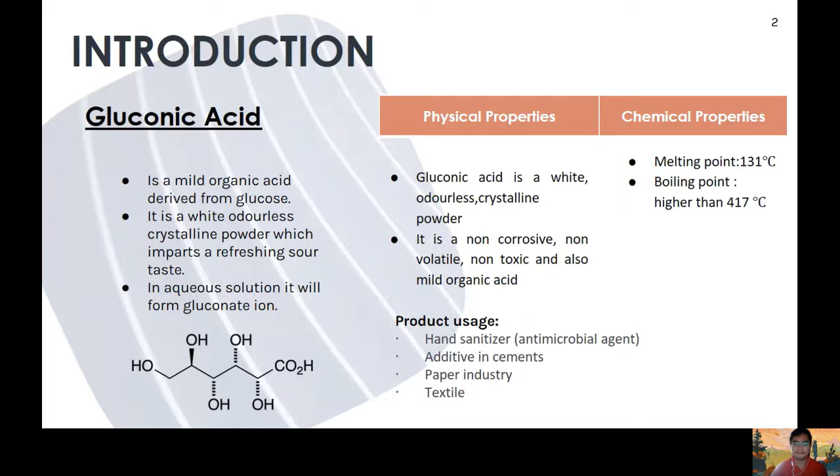The raw material for the production of gluconic acid is oil palm frond. There are several parts of oil palm which we need to consider: the OPF, empty fruit bunch, and the kernel shell. The OPF was chosen because the resource availability is around 45 million tons, whereas the EFB and kernel are only 9 million tons and 4 million tons respectively. The resource cost of the OPF is around 62 cents per kilogram. For the EFB it is around 40 cents, and kernel is around 45 cents per kilogram.

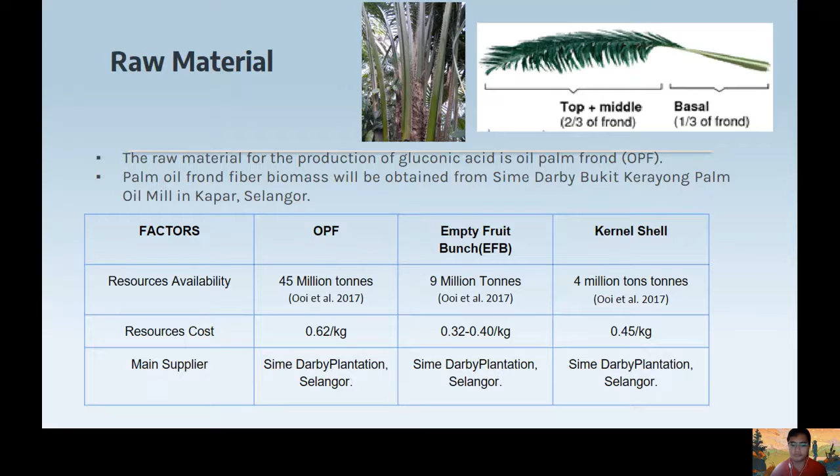For the process design level 1, this is our process structure. The raw materials of this process are air, ammonia as the nitrogen source, sulfuric acid for the acid pretreatment, water, cellulase enzyme, Aspergillus niger SP, and the oil palm frond. For the products of this process, the main product is gluconic acid, the waste materials are the black liquor and wastewater, and the side product is the biomass. We also produce carbon dioxide as waste from this process.

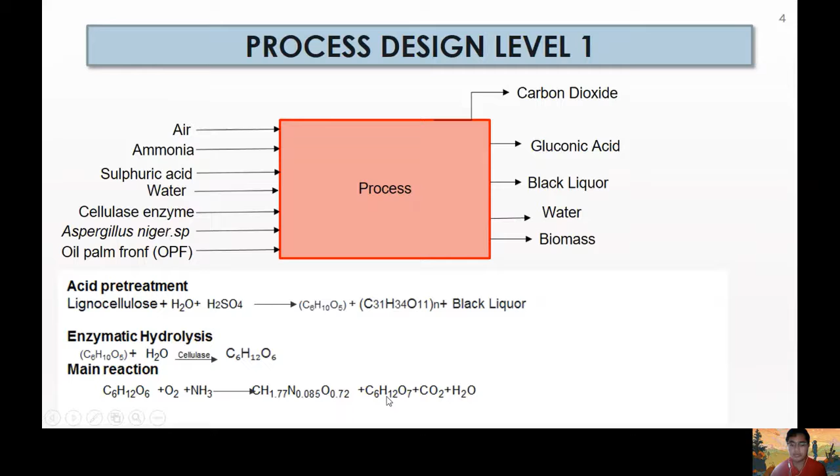For the acid pretreatment, the lignocellulose, which is part of the OPF, will be treated with sulfuric acid at only 4% concentration, and we produce cellulose, lignin, and black liquor. The cellulose from the acid pretreatment will undergo enzymatic hydrolysis, where cellulose reacts with water with the help of cellulase enzyme to produce glucose. The main reaction is the fermentation process, where glucose plus oxygen and ammonia will be fermented to produce biomass, gluconic acid, carbon dioxide, and water.

OPF consists of several components such as lignin, hemicellulose, and cellulose. OPF will undergo the pretreatment process to separate the components to obtain the cellulose. Cellulose, water, and cellulase enzyme react with each other in the reactor to produce glucose. Once the glucose is obtained, it is fed into the seed fermenter with the A. niger. Oxygen is needed for growth as it is an aerobic organism.

Next, it is fed into the main fermenter to produce our desired product, gluconic acid, and also obtain the byproduct. Then, it will undergo multiple separation processes: first filtration, then crystallization, centrifugation, and finally drying. The desired product, gluconic acid, is obtained in the solid phase at the end of this process.

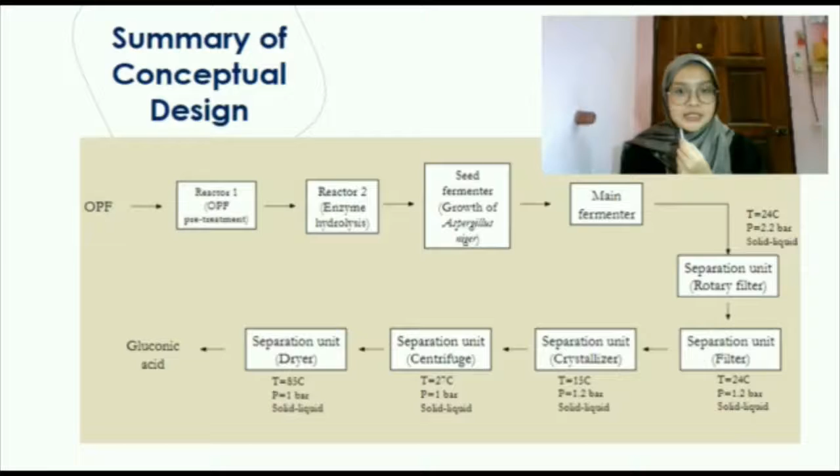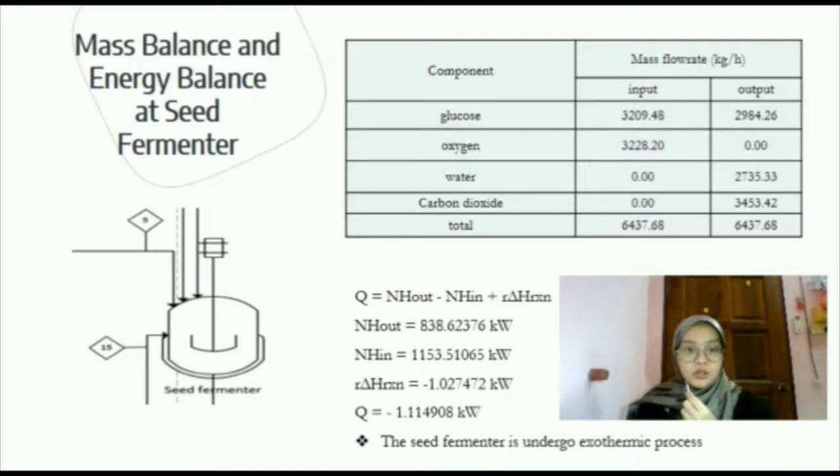Mass balance and energy balance for every unit operation was conducted. This slide shows the mass balance and energy balance for the seed fermenter. Based on the table, the mass flow rate for input and output streams in the seed fermenter is balanced with a total of 6,437.68 kg per hour. The reaction in the seed fermenter is exothermic since the value of Q is negative 1.114908 kilowatt.

Next is the mass balance and energy balance for the main fermenter. Based on the table, the flow rate of input and output streams of the main fermenter is balanced with a value of 18,122.54 kg per hour. The equipment undergoes an exothermic reaction as the value of Q is negative 1.64490 kilowatt.

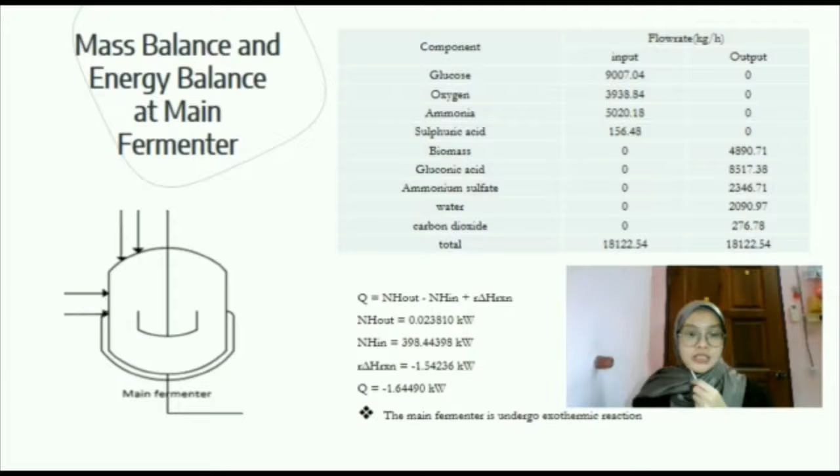Next, both graphs show the relationship between temperature and conversion in the seed fermenter and main fermenter. As we can see, the process is adiabatic. As the temperature increases, the conversion also increases. The reaction is an exothermic reaction.

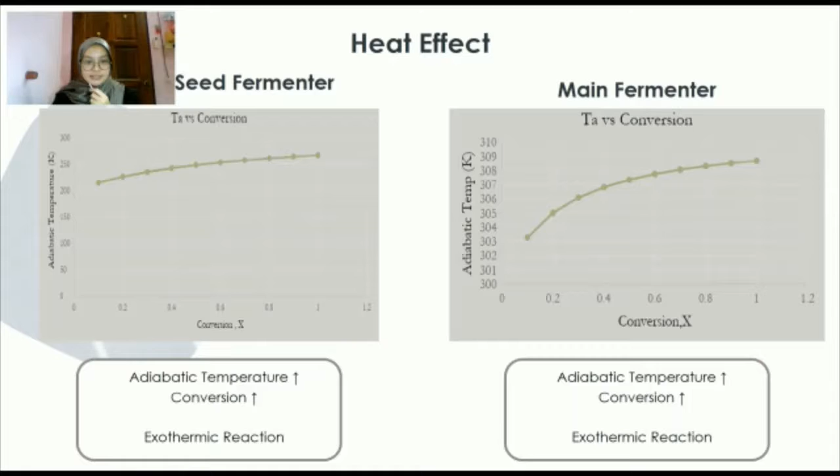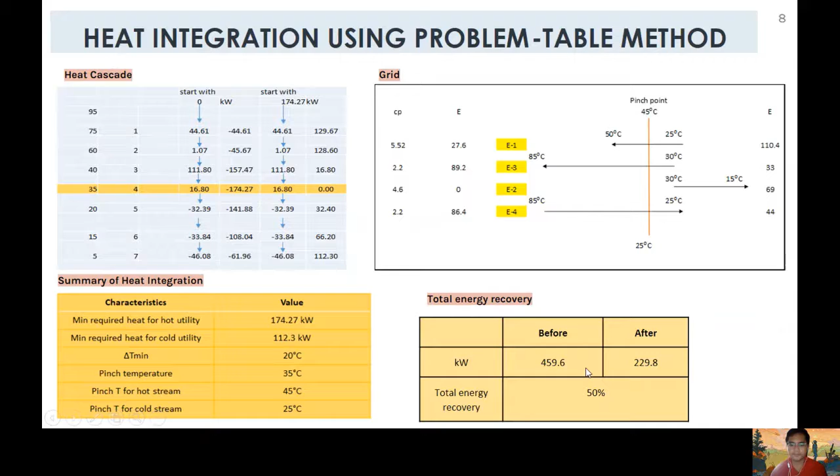For the total energy recovery, before the process is around 459.6 kilowatt, and after heat integration is 229.8 kilowatt. So the total energy recovery is at 50%. So this is our PFD after heat integration. You can see the cold stream and the hot stream.

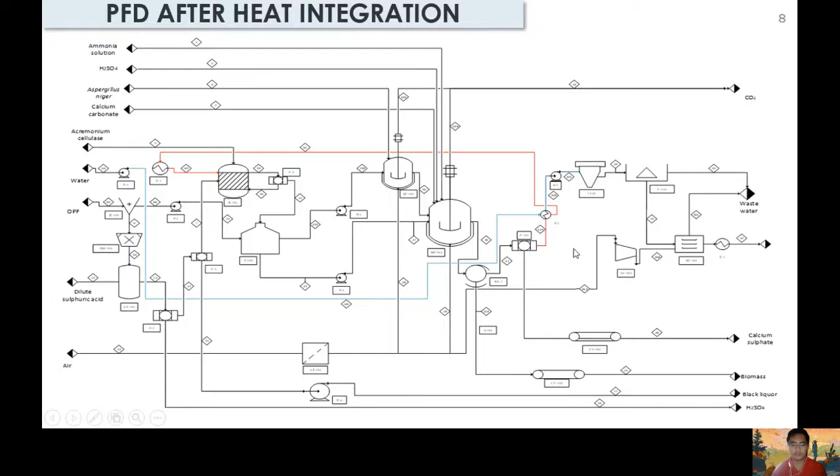Piping and instrumentation diagram for our design project, which is titled Gluconic Acid from Oil Palm Biomass. We are using Aspergillus niger as our bacteria in order to produce a high yield of gluconic acid. Examples of controllers that have been used in our design project are the anti-foaming controller, pH controller, temperature controller, flow controller, and level controller. The objective of these controllers will be discussed in the next slide.

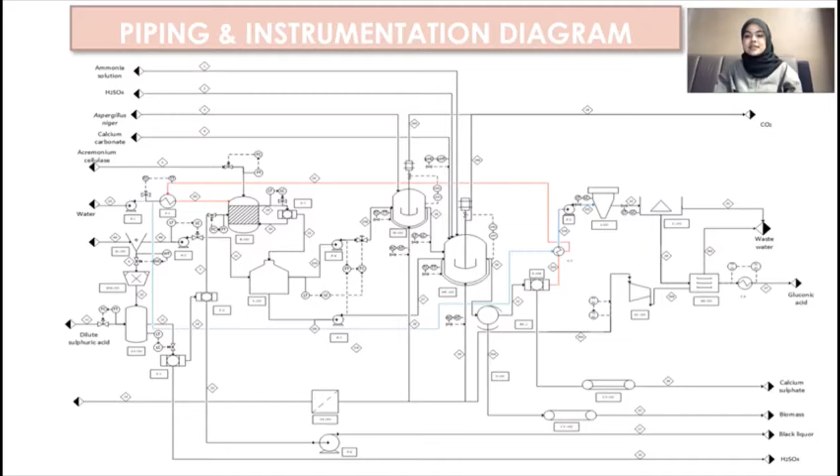Instrumentation and control summary for the first equipment, which is seed fermenter SF101. The type of control that we use is a temperature controller, which is to control the temperature of process fluid at a desired temperature. And then dissolved oxygen controller, it is to maintain the necessary dissolved oxygen concentrations. Anti-foam controller is to control the foam formation, and also level controller to control the level of working volume of the fermentation fluid.

Next equipment is the main fermenter, MF102. The controller that we use is a temperature controller. It is to maintain the temperature of medium in the main fermenter at the desired temperature of 28 degrees Celsius. For pH controller, it is to maintain the pH of the medium of Aspergillus niger, which is our bacteria, at the desired pH, which is around 5.5. For dissolved oxygen controller, it is to control the dissolved oxygen in the process fluid. And then anti-foam controller, it is to control the foam formation.

Next equipment is a storage tank, which is T101. The controllers that we use are a level controller and also flow controller. It is to maintain the level of the glucose storage tank and also to control the flow rate of the glucose based on the level controller. And then the reactor R102. The controllers are temperature, flow and also level controller. It is to maintain the temperature in the reactor at T equal to 37 degrees Celsius and also to control the flow rate of the inlet stream and also to maintain the level in the reactor.

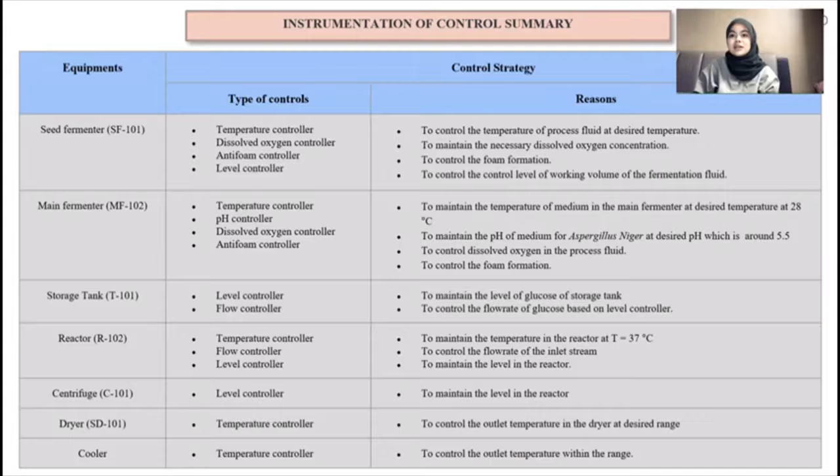For centrifuge C101, the controller that we use is a level controller. It is to maintain the level in the reactor. For dryer SD101, the temperature controller is to control the outlet temperature in the dryer at the desired range. And lastly, the cooler has a temperature controller, which is to control the outlet temperature within the range.

Assalamualaikum warahmatullahi wabarakatuh. My name is Muhammad Hanif bin Zakaria, and now I will continue our presentation for the process safety part. So in our production of gluconic acid, we are following the major acts, which are OSHA, Occupational Safety and Health Act 1994, Act 514. Next is Environmental Quality Act, 1974. And we also follow the Factories and Machinery Act, 1967, Act 139.

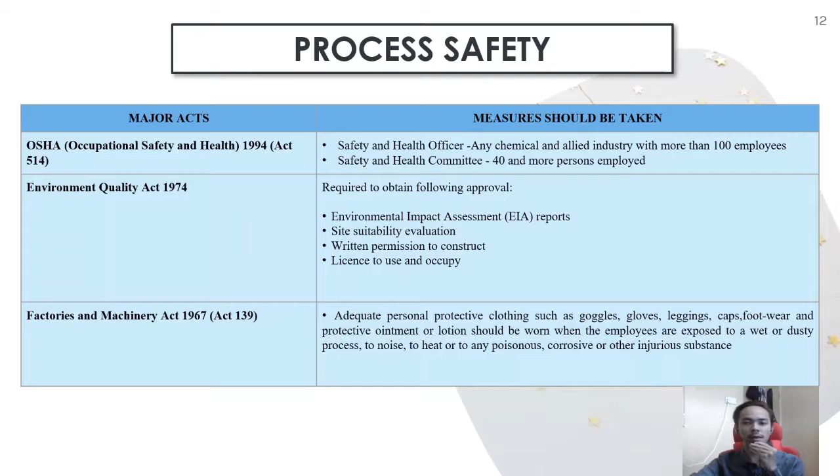For the HIRARC analysis, in our production plant, the hazard that can occur is the explosion from the reactor due to over temperature. The risk level is high, so we can control the risk by installing the high temperature alarm and also the emergency response plan. Next is the oxygen pipe inlet that can cause fire due to ignition at the lower temperature. So it also has a high risk level. So we can also control the risk by installing the high temperature alarm and also the emergency response plan.

And next is the addition of ammonia in the seed fermenter, which can cause physical injury. The risk level is medium, so we can schedule inspection and maintenance for the equipment. Next is storage of sulfuric acid, which can cause physical injury due to overflow. So we can control it by scheduled inspection and maintenance of the equipment. Next, the pumping of sulfuric acid also can cause physical injury. So we can also schedule inspection and maintenance of the equipment.

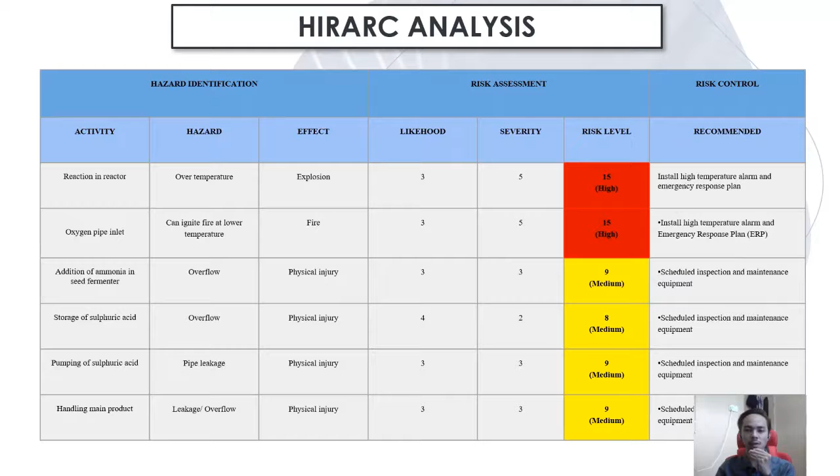Thank you. From the first table, we can see that our plant is modified from year 2021 until 2023, and our plant design life is 20 years. The production capacity increases from 2023 onwards. From the second table, the manufacturing cost that we obtain is 37.61 million. Non-manufacturing cost is 29.86 million. Fixed capital investment is 67.47 million. Working capital, 10.12 million. Total capital investment, 83.81 million.

Direct manufacturing cost is 13.77 million. Local taxes, 1.35 million. Property insurance, 0.67 million. And also fixed charge is 8.27 million. Plant overhead cost is 2.04 million. Cost of manufacturing is 22.03 million. For general expenses, the cost obtained from our design project is 2.88 million, total production cost 24.91 million, and depreciation is 7.81 million.

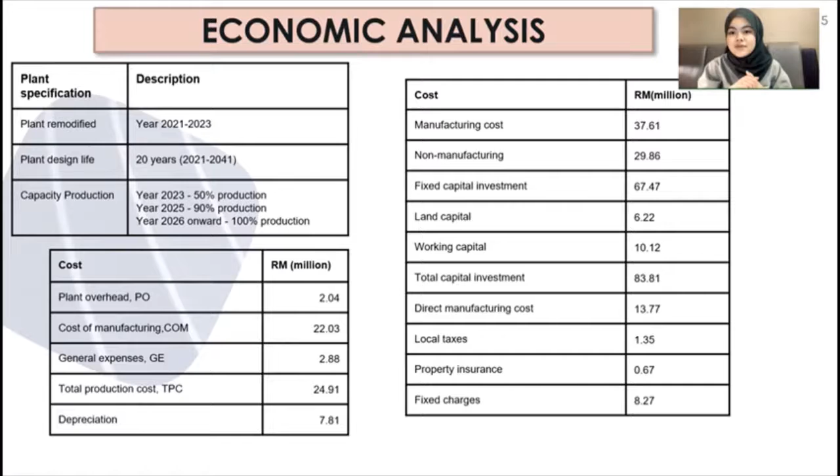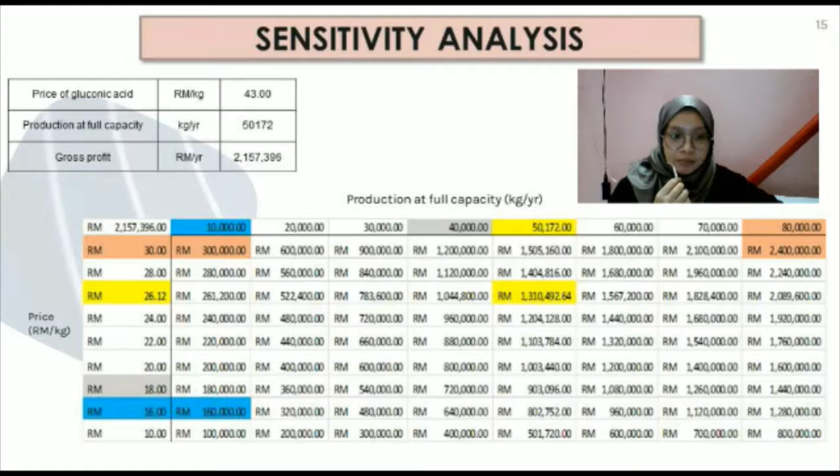Very good evening to my fellow lecturers and my fellow friends. My name is Tushan Raghunathan with matrix number GA04276, and this is my final year design project regarding production of gluconic acid from oil palm biomass.

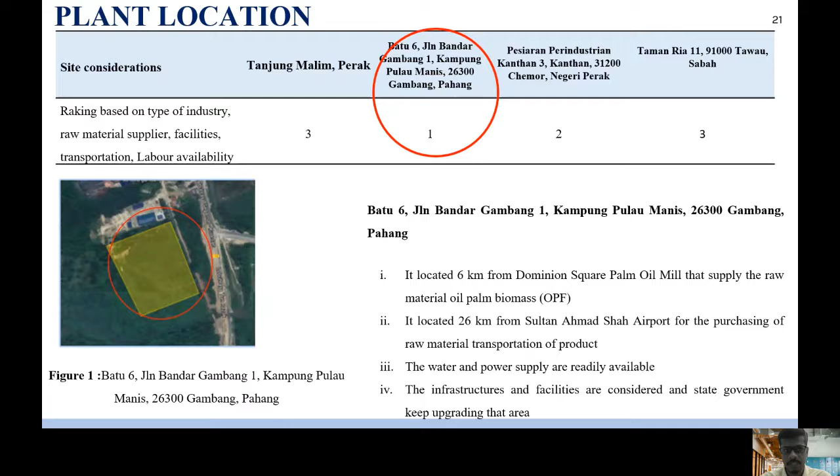For the plant location, we have selected Pulau Manis, which is in Gambang, as the preferable site based on type of industry, raw material supply, facilities, and labor availability. Not only that, based on the plant layout, we have also managed to find a separate section for the plant process and to provide the emergency exit and assembly point for the workers. The direction of prevailing wind will also affect the plant layout.

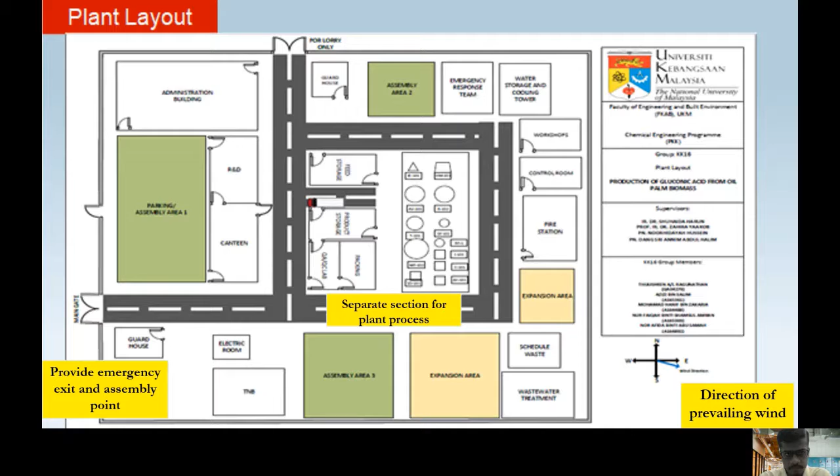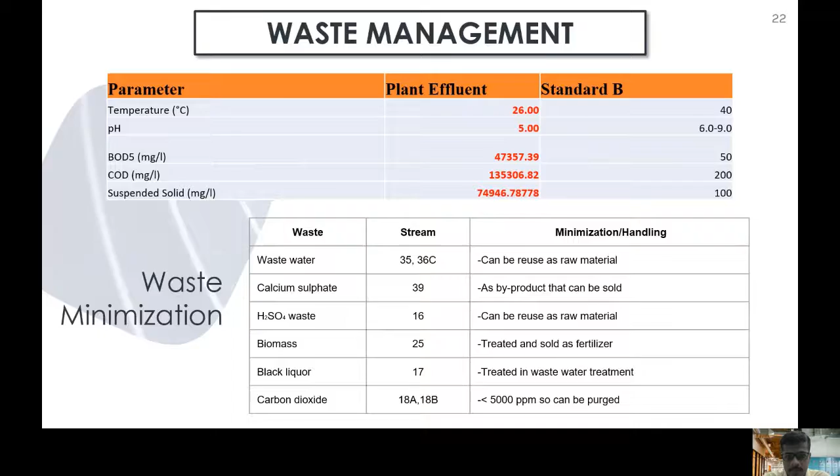As for waste management, the total plant effluent has a temperature of 26 degrees Celsius, pH 5, a BOD value of 47,357, and COD value of 135,306. After treatment, the final effluent released into the waters based on standard B was 46.62 for BOD, whereas the chemical oxygen demand was 133.19. The total suspended solid was only 73.78.

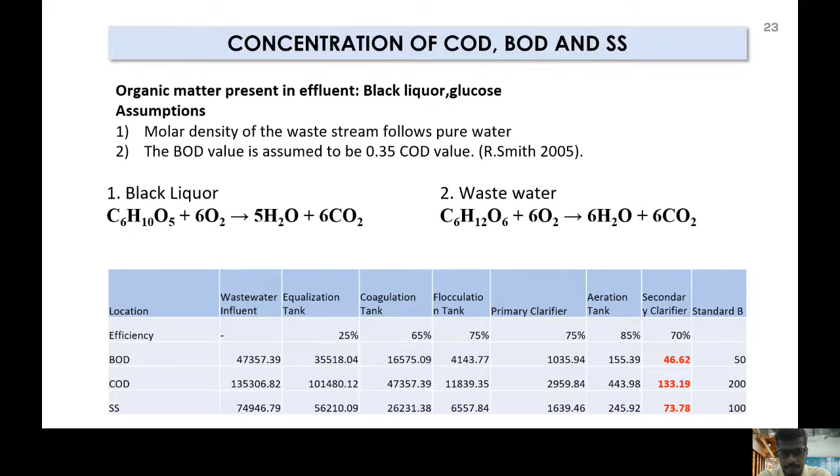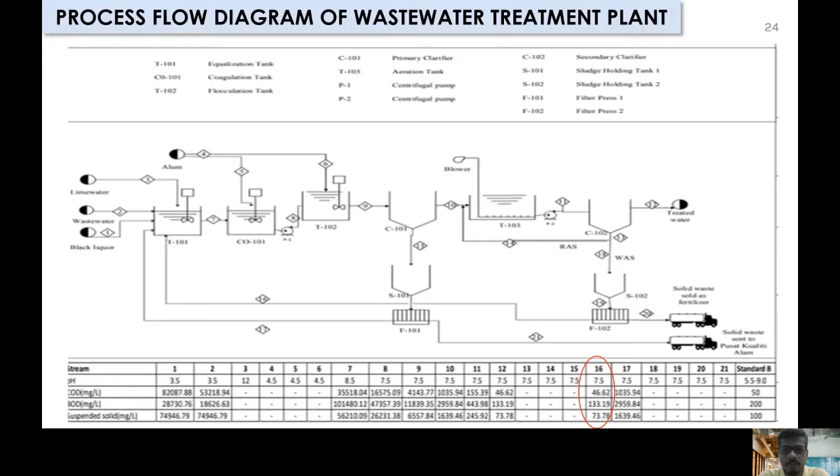Thank you. So as for the conclusion, our plant is producing gluconic acid, which acts as an antimicrobial agent and hand sanitizer, and also as a component for reaction with chlorhexidine to form chlorhexidine gluconate. Our plant capacity is 50 tonne per year. Our plant location is at Gambang, Pahang. We are using dilute sulfuric acid, Aspergillus niger, oil palm biomass, and water as our raw materials to produce the gluconic acid.

So after doing the economic potential until level 4, we found out that our plant production is profitable. And lastly, the concentration of COD and BOD in our plant is reduced by the wastewater treatment plant.